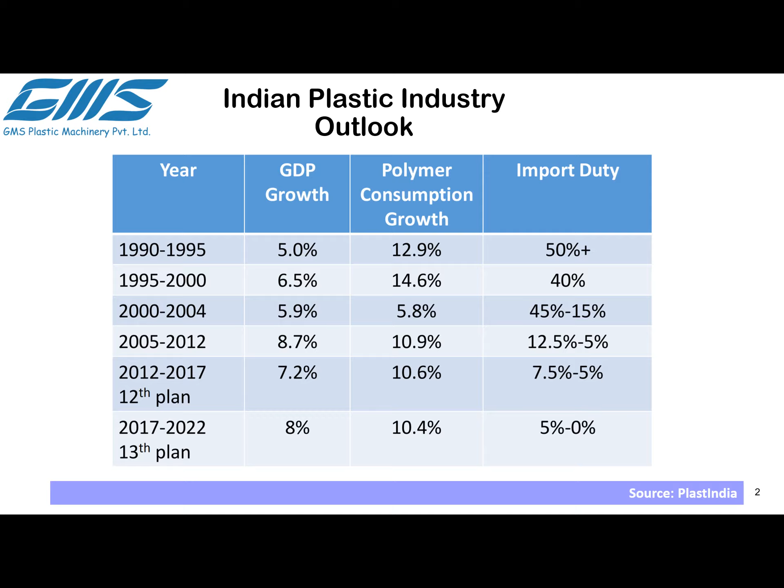basically, the growth of plastic industry is drastic, and you can see here nearly from 1990 till date, we have about 10.4% growth in polymer consumption, as against imports which have reduced from 50% plus to 5% only. So you can see that the local consumption is a lot as against imports, and the consumption still remains growing at 10.4%. Right up to 2022, we anticipate similar growth, that is in the 13th plan.

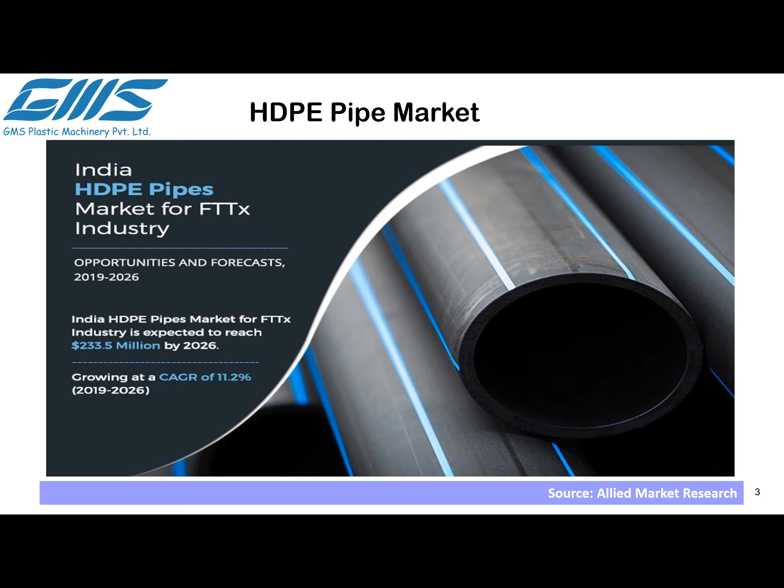As you can see, the HDPE pipe market is nearly around US dollars 233.5 million by 2026. So the growth level is around 11.2% in 2019 to 2026. That is a good growth as far as HDPE pipe industry is concerned.

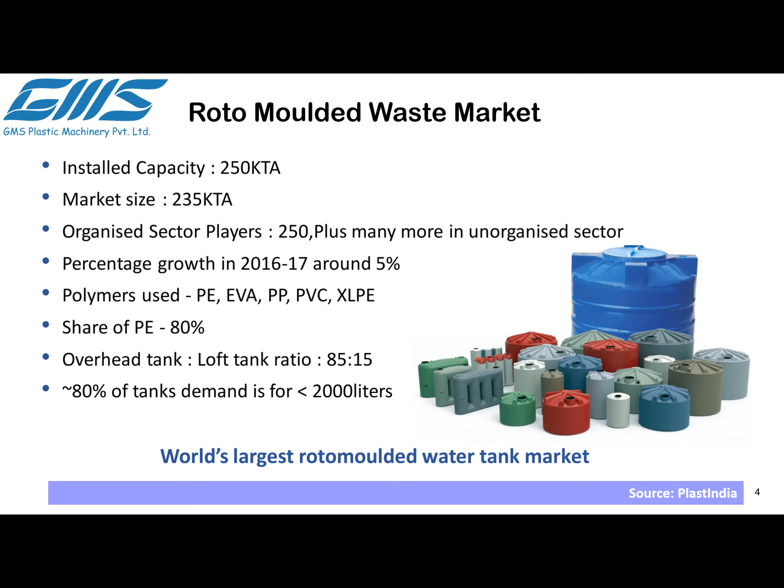In rotomolding industry today, the installed capacity is around 250 KTA, whereas against that market size is around 235 KTA. Organized sector players are around 250 plus, whereas percentage of growth in 2016-17 is 5%. Polymers used for this industry are PP, EVA, PVC, and XLPE. Share of PE is around 80%. These are mostly overhead tanks and other applications.

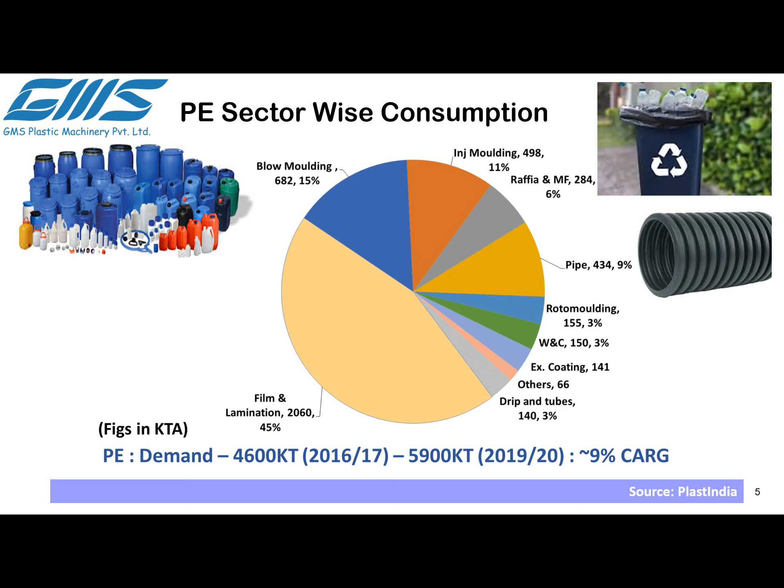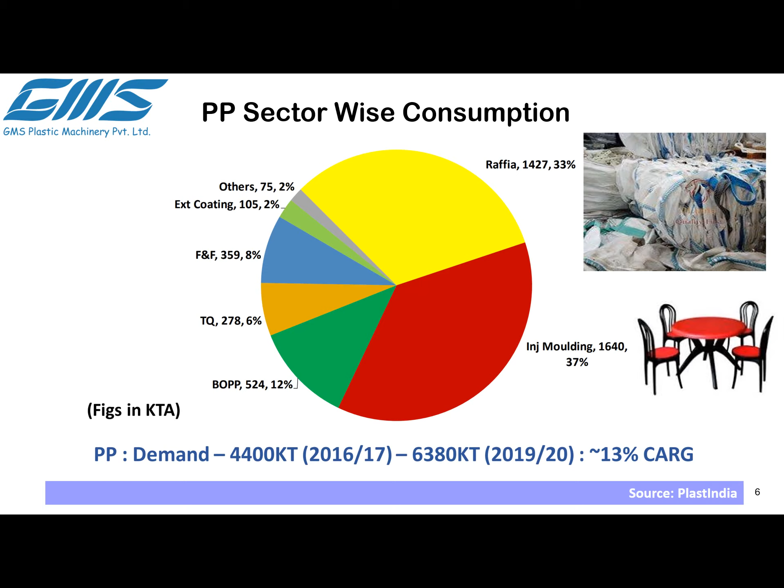The estimated quantity of recycled plastics is 5.5 million metric tons in 2017-18, and it's around 7 million metric tons in 2019-20, and expected to grow at the rate of around 3.1% CAGR. So that's a good growth as far as recycling industry is concerned.

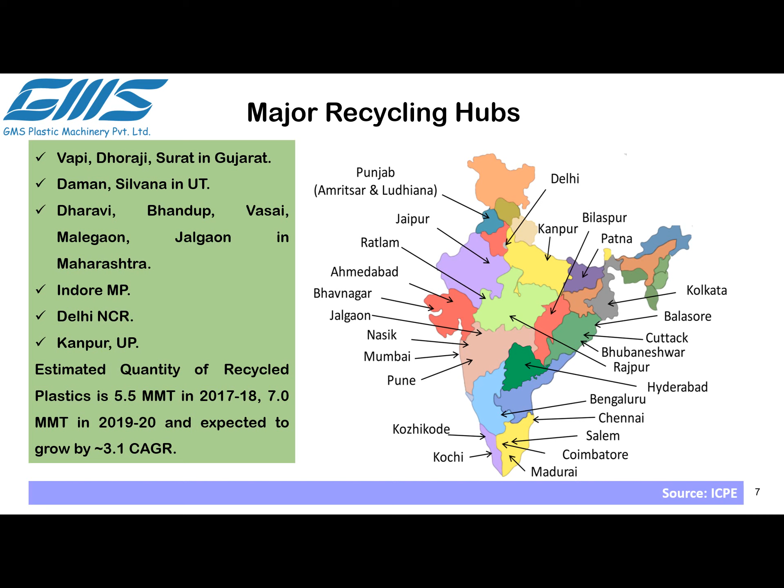Okay, now let's go to the PE pipe and article waste recycling technology.

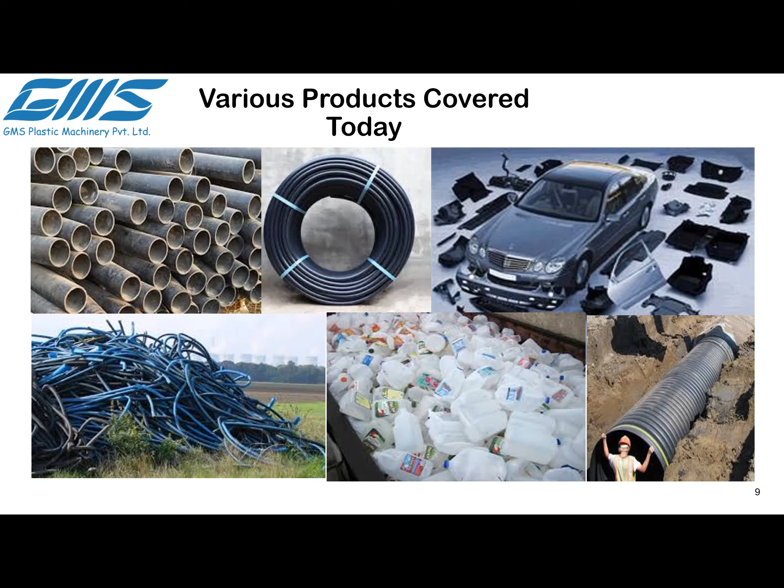The basic reason we joined hands for this webinar is to show you the technology that we can offer in a complete automation system. We normally don't produce grinders, so we have joined hands with PIMCO for their grinders, shredders, and other ancillary equipment, so that a complete package can be delivered to clients, and due to which we were able to develop a lot of equipment.

Okay. The various products being covered today: firstly, HDPE pipes. You can see the dirty HDPE pipes which are reclaimed from different sectors, the agricultural sector, the construction industry, the infrastructure industry. Then these are the household conduits. Then we are talking about automobile waste, like bumpers, mud flaps, the interiors of the car. Then we have the other flexible conduits, like corrugated pipes, single wall corrugated pipes, etc.

And then we have the drum waste. Again, as I said, the corrugated pipe waste, then the injection molded waste, roto molded waste. To do the complete process, we have to do washing and recycling. For washing, the good operation of a line is the basis to obtain high quality washed waste. If you really want to do proper recycling with a good shine, good luster, the waste needs to be washed. And if you are going to do post-consumer waste, washing is an important factor.

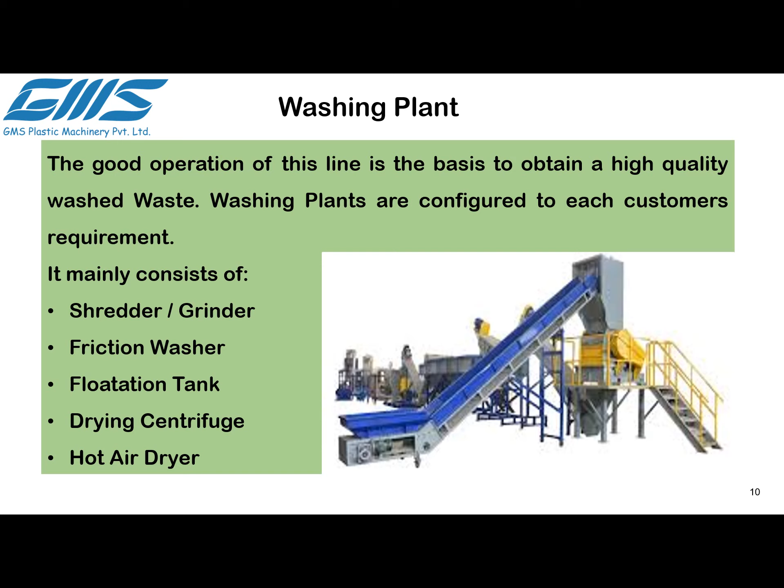Washing plants are configured to each customer's requirement independently. So every customer approaches us and we understand their requirement and configure the line accordingly. So sometimes you may have two flotation tanks or one, depending on the need. The line mainly consists of a shredder or a grinder, or a shredder grinder combo. Then there is the friction washer. Then there is the flotation tank.

You can see here in the picture the grinder with the screw conveyor, then the flotation tank, then the screw conveyor, then the friction washing, another flotation tank. So systems can be adapted depending on the dirt nature of the waste and accordingly designed to fulfill the requirements. Then there is the drying centrifuge and a hot air blower. The hot air blower should be designed in such a way that we are able to achieve 98% dry waste, so that it can be connected directly to our recycling machine and we can achieve the required quality.

Then comes the semi-automatic washing plants. Of course, we call it semi-automatic because at every stage you need labor to move the material from one stage to the other. That's the only reason for being semi-automatic.

The other important factor is to feed the waste continuously along with all the required detergents, etc. In a fully automatic system, everything is automated, including detergent feeding systems. So when we talk of a semi-automatic system, you can make it a little more automatic by adding a few conveyors if you are short of labor.

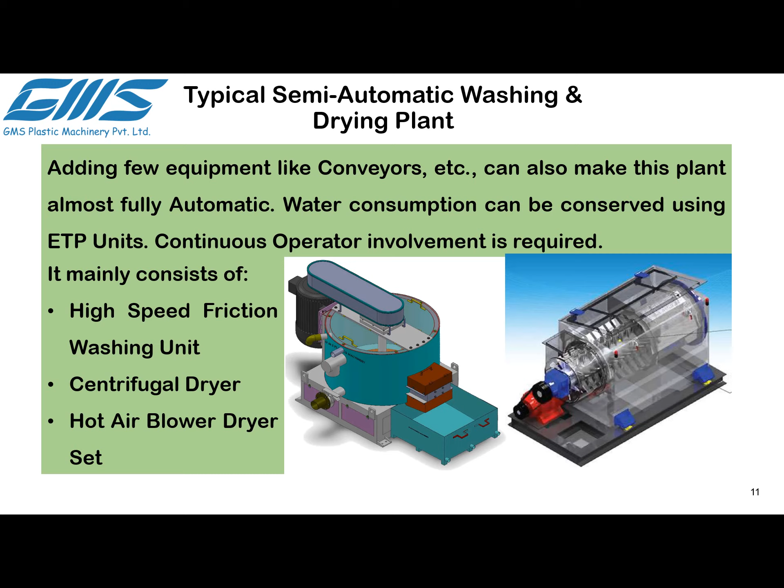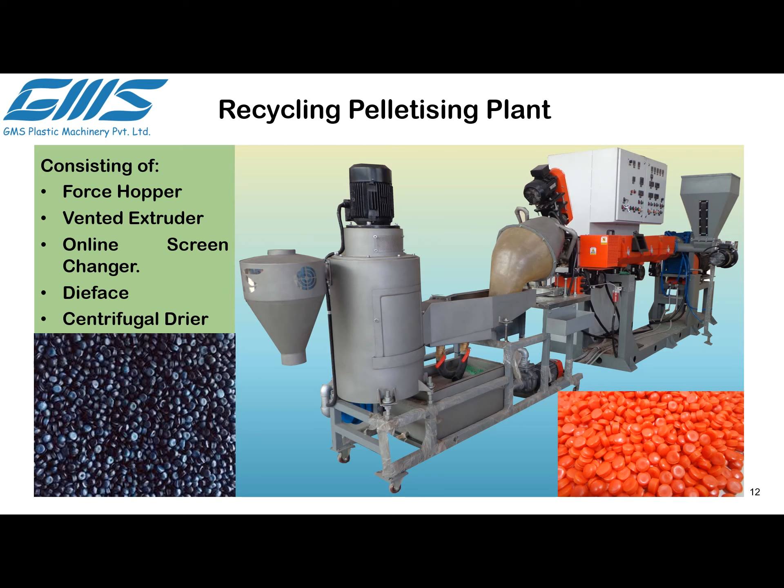But ideally it is not the right solution, because if you really look at the screw barrel life when you're putting dirty waste inside, it is going to be very short. Again, the configuration would be similar.